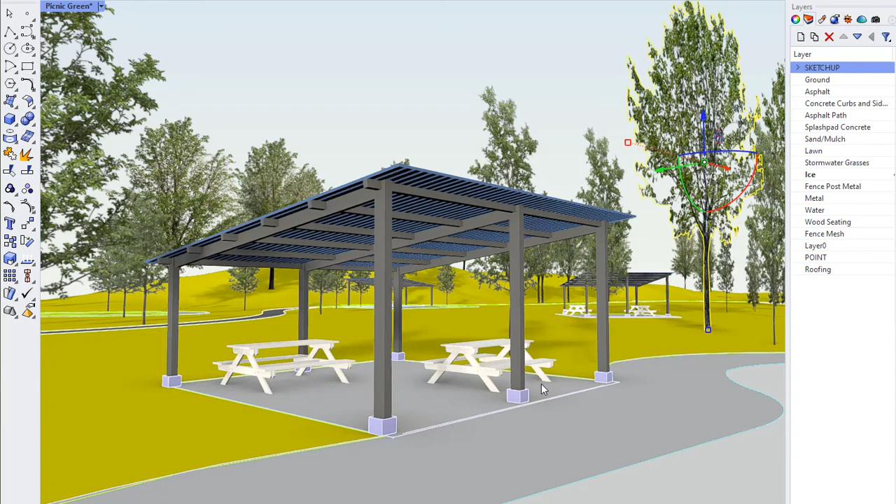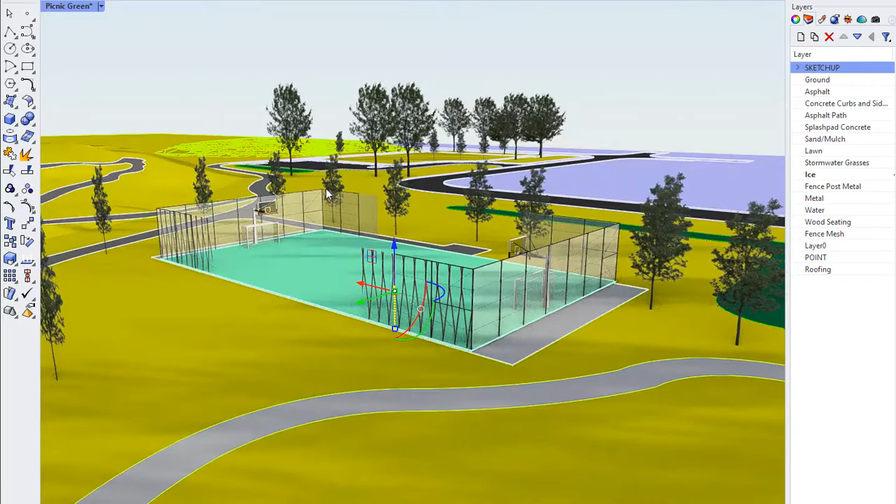Okay, so I'm going to show you a slightly different version of the site model that you have right now. This is a working file I prepared for the real project with adapted pavilions, different play equipment, some more naturalized elements, and some custom benches. Over here we have a basketball court and a surface over top for an ice rink. I'll go through each element and tell you what was imported and what I changed.

So the existing picnic pavilions from the original model, I hope we can all agree those are awful. If anyone looked at them and thought that's fine, please go wash your eyes out with soap, because the only thing worse than bad design is nobody-gives-a-shit design. Our public spaces need to be better than off-the-shelf bad components and Home Depot builder-grade aesthetics.

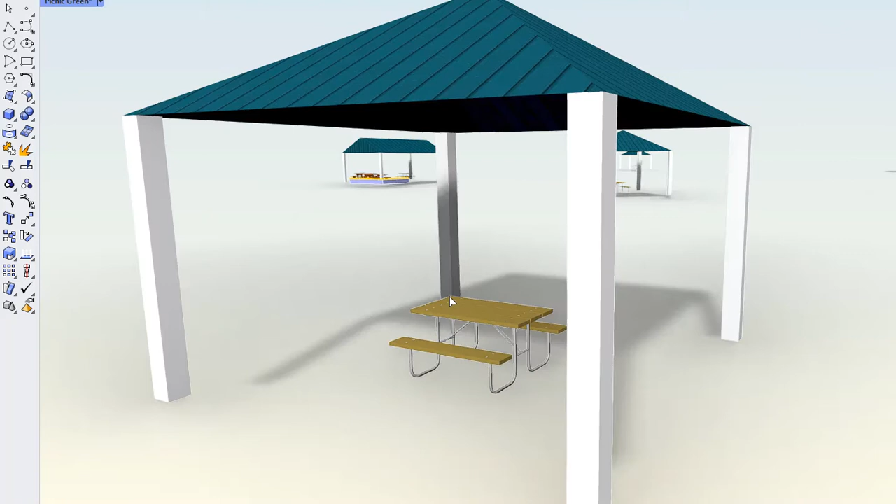Jan Gehl once said, with regards to the fact that Copenhagen sidewalks are paved with granite, that if you want to look at what society values, just look where they invest their money. Let this little tirade be a plea to always advocate for as high quality public realm design as you can possibly get, because we're creating spaces important to the human condition and their connection with nature.

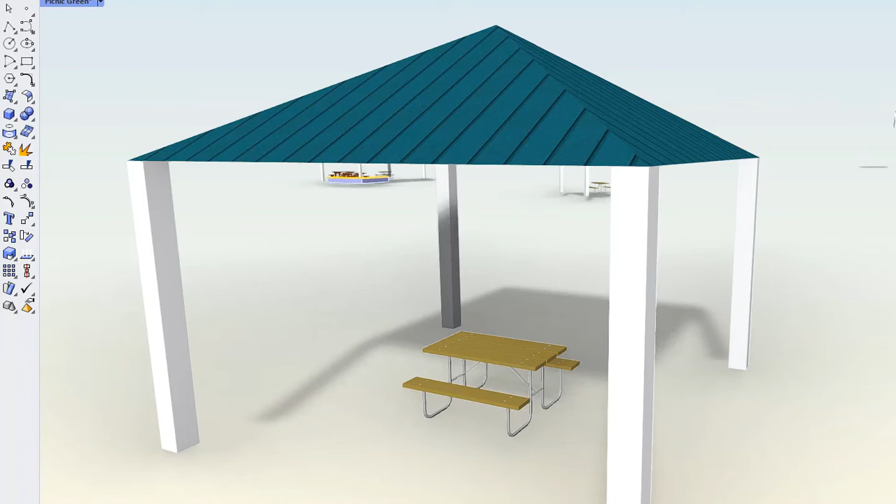Remember the ultimate purpose here. This is a park within the city of the future. If we're still allowing cheap crap to populate our public spaces in the future, that's not a future I'm looking forward to. So these play equipment are straight up imported from the SketchUp warehouse.

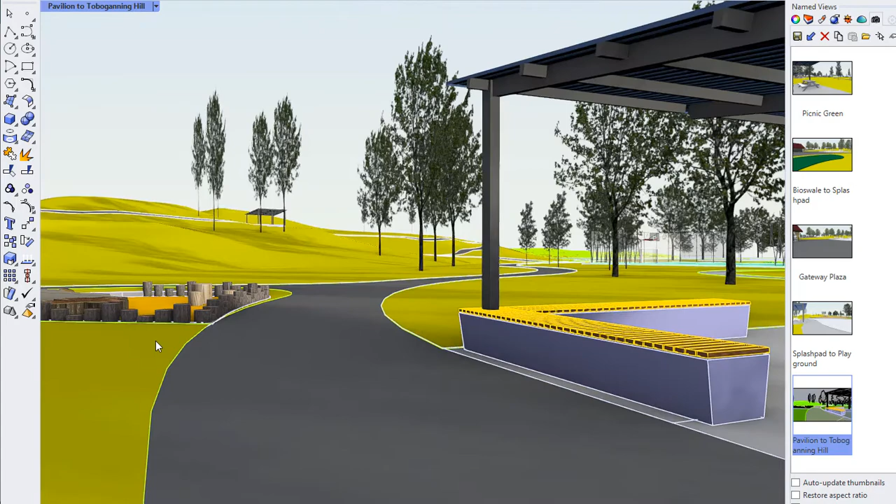In retrospect, I probably should have just imported them directly to Lumion, but nevertheless, here they are. Over here are some naturalized logs in the play area, and look, I didn't even finish this edge. This is another example of strategic targeted modeling - if it doesn't impact my final view, then I don't need to model it.

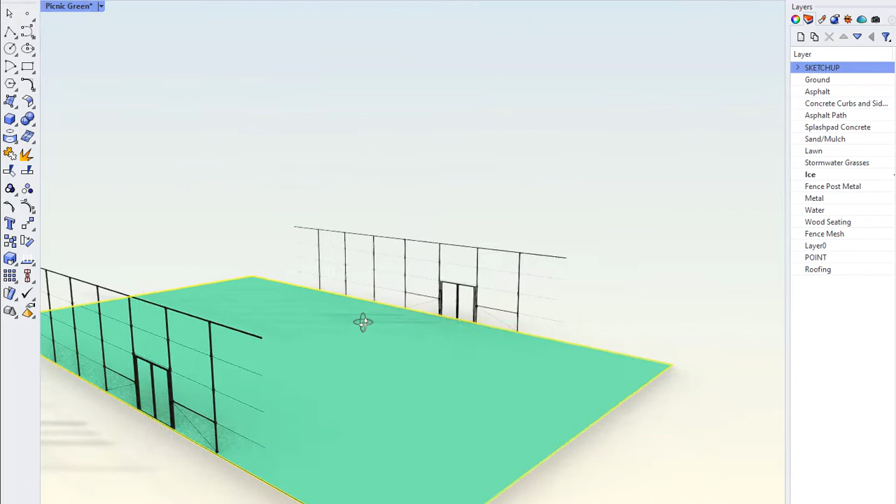This basketball court is from the SketchUp warehouse also, but I altered it so the sides have open panels. I basically exploded it, removed the pieces I didn't want, and regrouped it back together. Then I added a small thin poly surface over the top and put it on its own layer called ice so I could apply a material in Lumion later. We'll get to the workflow of assigning objects to layers by materiality in another video following this one.

The only element I modeled from scratch is this concrete and wood bench installed in the corner of the pavilion. I'm going to walk you through that process now. It's really simple - I start by drawing a polyline from the midpoints of the concrete base, going off of what I want to achieve in the view.

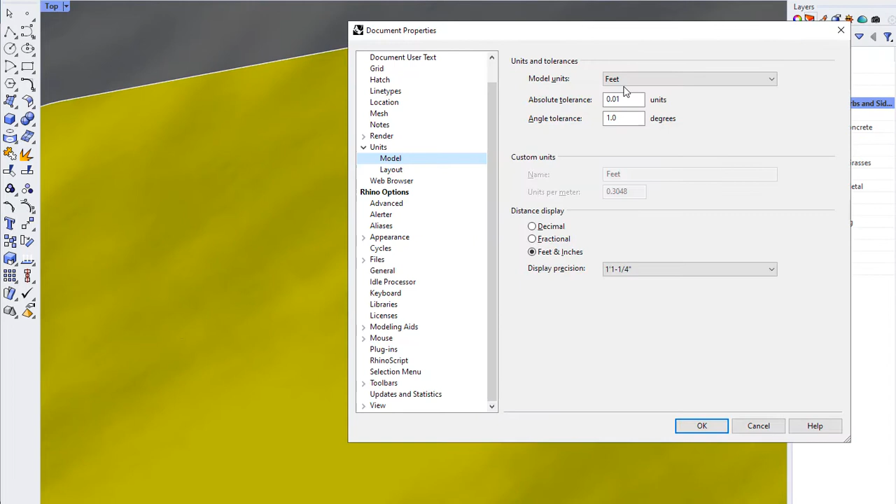I just wanted a concrete base and a wood top, so I offset this by 2 feet. I had to check my units here - I remember this is in feet and inches. A standard bench width in millimeters would be around 600 mils.

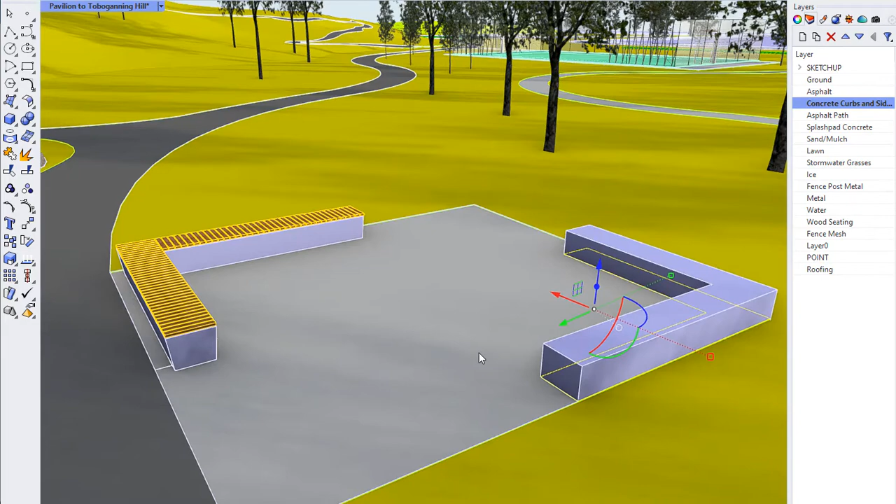I'll cap off the ends with lines, join it into a closed polyline, and then extrude it to around 18 inches high, or 450 millimeters - that's a pretty standard bench height. Next, I'll offset the polyline we used to extrude to the inside by around 2 inches.

And then explode that, deselect the end pieces, and join them back together again. I'll use the outside polyline as a target and use the command EX for extend, then click on these lines to bring them all the way to the edge.

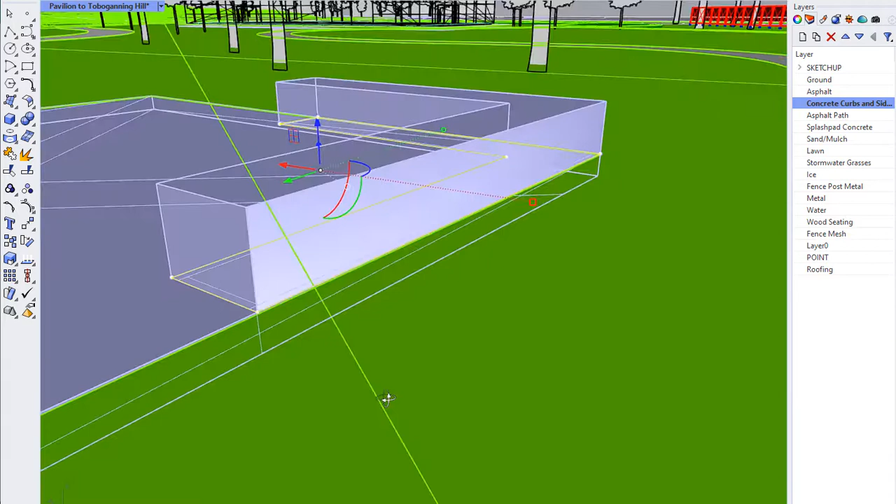Now I'll use the command move edge and just grab the edge of the poly surface at the base and match it up to the inside line to create an angled front. I'll repeat that on the other side and all the way around the other 2 sides.

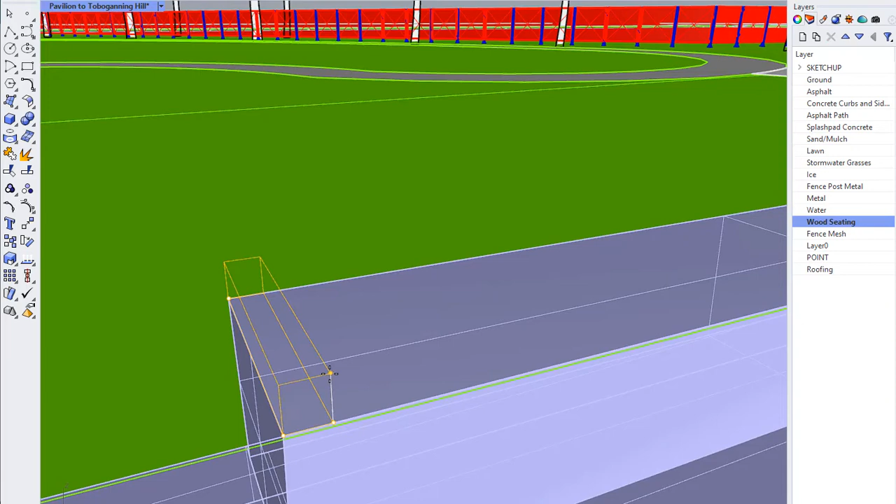For the top, I'll change layer onto the wood layer, then use extrusion from 3 points to make a piece of dimensional lumber around 3.5 inches wide and 1.5 inches high. I wasn't doing high design for this view - I just wanted a basic wood surface with spaces in between.

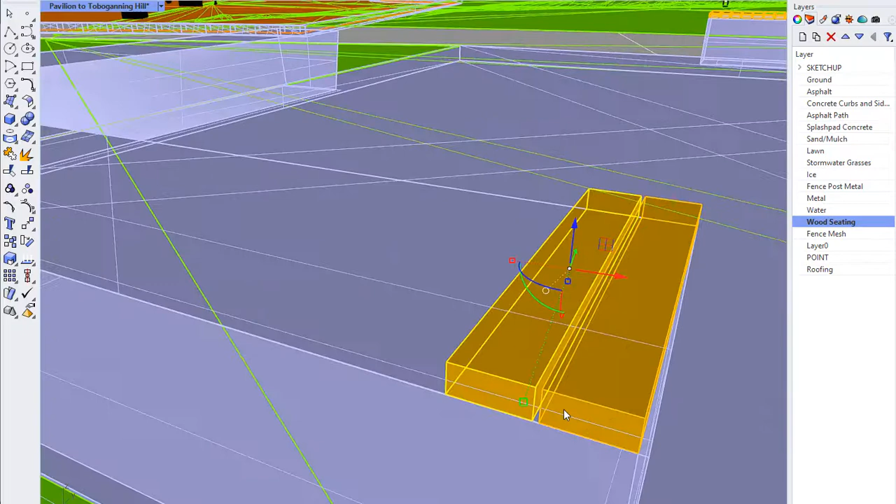So I'll copy this piece over and move it about 1/4 inch to create a gap. Now I can draw a line all the way to the end and measure the space between the beginning of the wood element and the next element. I'll use the divide command on this line - DIV - to divide it, and select by length into exactly 3 3/4 inch increments.

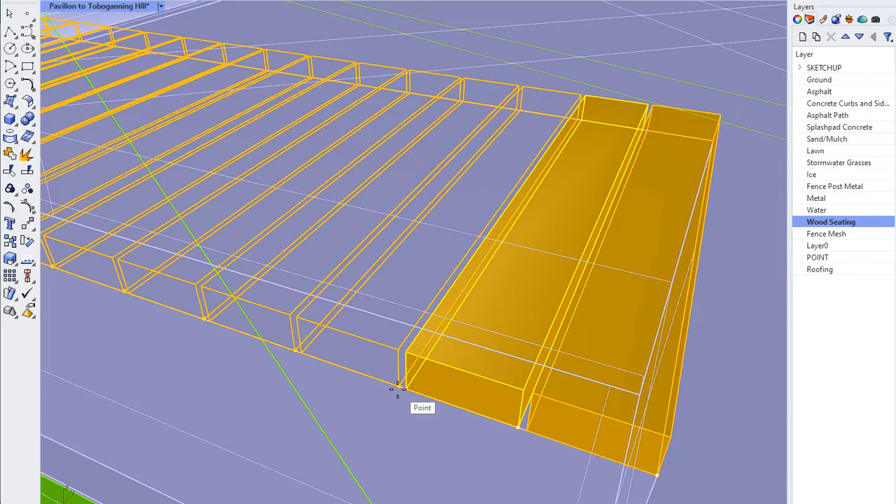Notice how we have points here now. So I can use the linear array tool, guessing around 30 elements, but I can always increase or decrease as needed if this isn't right. I'll use the points as my distance between elements, and now you can see it's laid out pretty much perfectly.

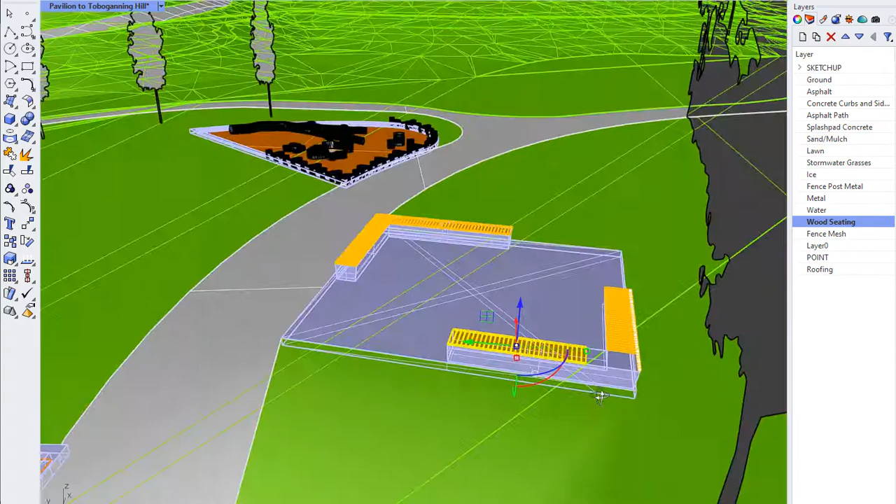So I'll group this seating topper and copy it over from this corner to this one, rotate it, and then copy and fill in the end of the bench that needs to be finished. I'll ungroup it, delete the pieces I don't need, and regroup the elements that should be associated with each other.

Now I can select all of the wood seating and lift it by around 1/2 inch to create a space between the concrete and the wood. Normally we'd have fasteners here, but in this view it's not like we're going to see that detail, so I wouldn't bother actually modeling it.

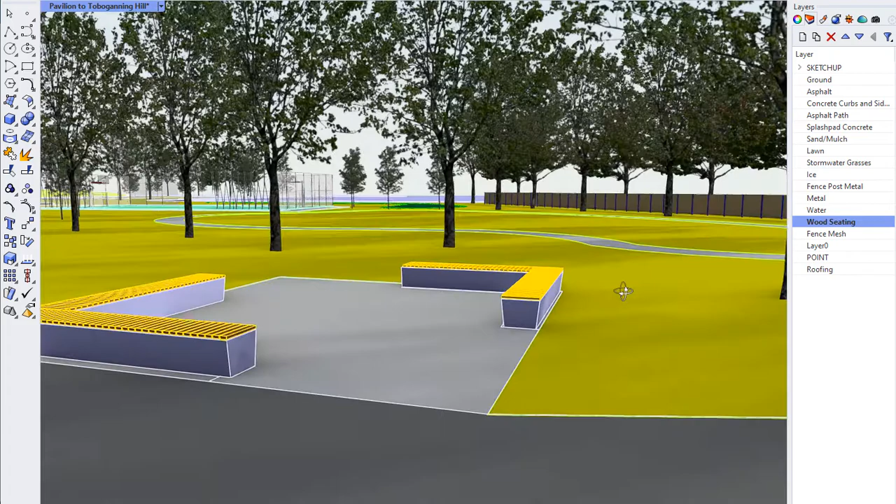And last, I'll set the concrete base, offset it, and move it by 6 inches here and 6 inches here. So if you need help modeling a specific component on your projects, reach out via Miro or email and I can try to do a demo for you.

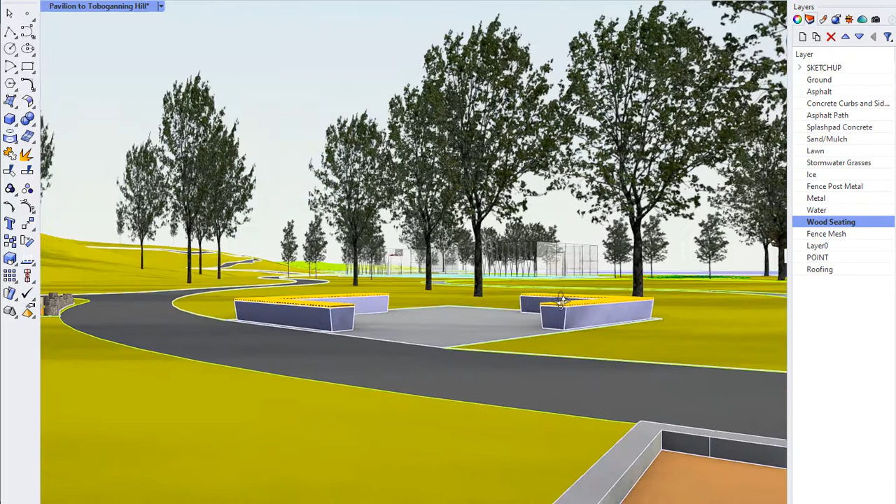It will help if you draw a section and plan first as a sketch of what you're trying to create. Then you can figure out what tools and commands you could use to duplicate the shape in Rhino. In the same way we've been analyzing precedents and visuals, try to analyze the components you want to design in your head.

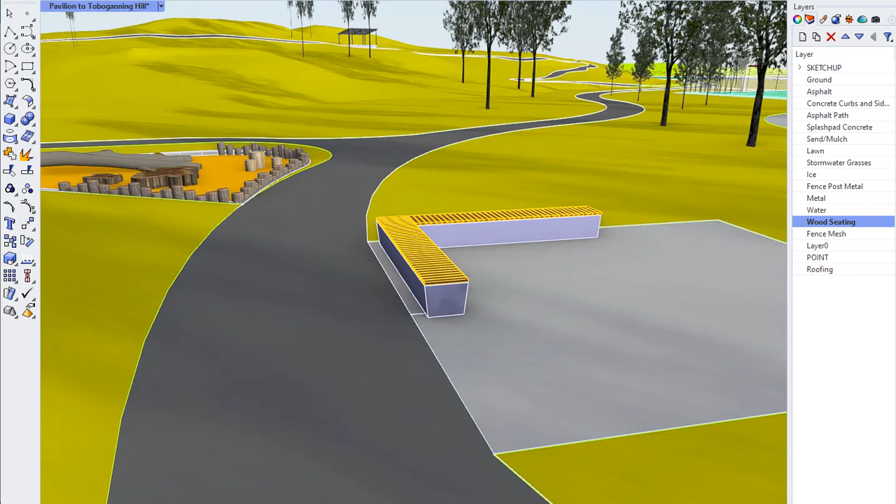Are they extrusions, sweeps, revolutions, or freeform? Do they have a continuous sectional element you could draw and use as a base to extrude or sweep? What materials are involved and how do they need to fit together? If you have an idea of where you want to go but don't know how to get there, reach out and let me know.